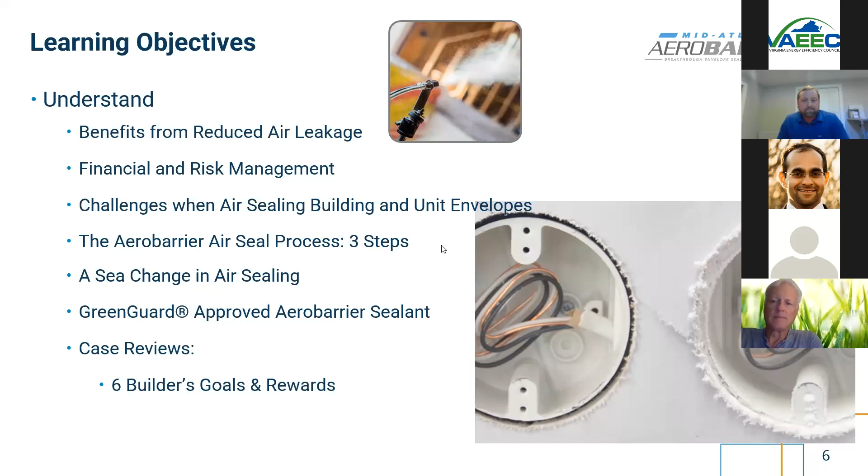So again, when discussing the benefits of reduced air leakage, this is really important to our end user, right? We've realized that we're reducing air leakage, and we have savings in home heating and cooling. But not only that, we're also reducing HVAC load requirements, so correctly sizing the HVAC equipment. And then operational costs benefit because of correctly sizing heating and cooling. We really want our end user to have a more comfortable home, and air leakage plays a huge part in that, over just what type of insulation we're putting in the house. So we want it to feel warmer in the winter and cooler in the summer. Those are the goals. We also want to help prevent moisture from entering the wall system.

So this is a big thing for us in terms of reducing conditions that can lead to mold growth and water infiltration. Some of the secondary benefits that we don't talk a lot about, from reducing air leakage, is that we really want to try to minimize noise transfer. We find that we can get up to 40% reduction in outside noise from traffic, neighbors, and even the multifamily space with adiabatic wall systems.

Down specifically in the Southeast, a big point of interest, and really across the US, we can use reducing air leakage to minimize insect and pest infiltration. So we want to seal up those gaps and create a good barrier between the outside and inside for critters to get in.

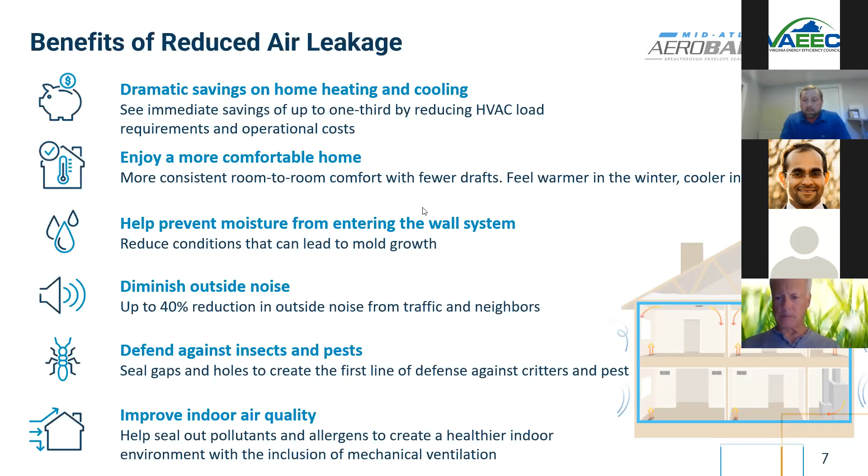So we're talking about the financial and risk management. Basically, we want to look at these bullet points in terms of our area of focus. I already talked a little bit about mechanical equipment. The first thing we want to do is right size equipment and our duct systems and vents if possible, engaging with our HVAC contractors and builders to make sure this is a good first step when we're talking about air leakage reduction.

The other part of this is we want to talk about warranty. How can we affect the warranty of the space by reducing air leakage? That should be playing into it, right? We don't want outside contaminants coming in, we don't want moisture coming into the building, because that can all lead to other things affecting the building products and create warranty issues.

And then we also want to talk about the build materials. When we reduce air leakage, we're also trying to extend the life expectancy of our build products in the space. The other big thing with reducing air infiltration is we can reduce it down low enough that it can have a positive effect on potential rebates, whether regionally based or even on a national basis for tax incentives. We talk a lot about 45L for residential and the 179D tax incentive for commercial space.

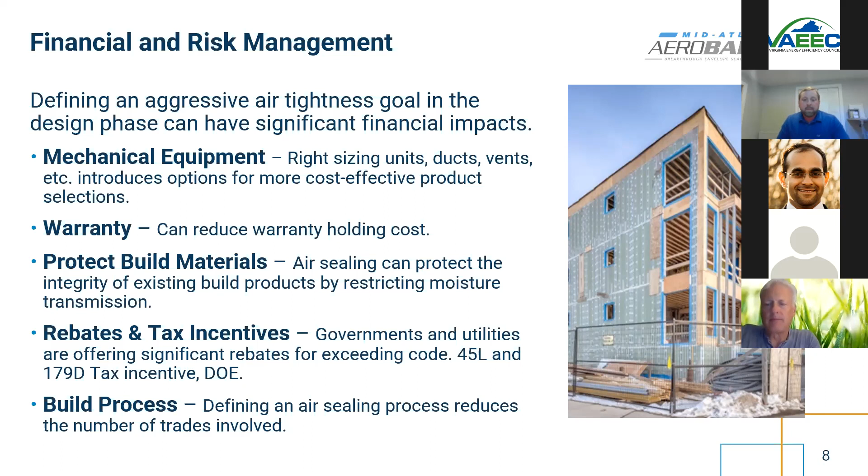And then about the build process: if we have air infiltration issues, how many trades will have to be involved in making corrections in the field? What does that do to our construction schedule, extending it out? I've seen it actually delay people moving into homes, or even into multifamily buildings where you have to put them up in hotels. So there can be some really adverse financial impacts directly related to air leakage that we don't think about on the back end.

I covered this a tiny bit in a few of the previous slides, but now really diving into the challenges with air sealing. With traditional air sealing, we know we have to involve many trades. There's sometimes a phrase around 'you drill it, you fill it,' but sometimes that gets lost in translation around who is actually filling the holes that are being drilled.

And then we also need to look at the list of materials that are involved in that as well. It could range from 2 materials up to 8, sometimes 9 or 10 different materials to achieve our overall air sealing goals.

And then we also need to work diligently on where to seal. To coach and train those in the field that are implementing, we first need to understand where our vulnerabilities are in the space. If we're fortunate enough to have an architect or developer make notations, or a governing body like a low-income housing tax credit program, or a green sustainable certification program call out specific areas, that isn't always the case. So we need to be able to understand where we need to seal and who is involved in that, and the list can be pretty extensive, and then who is supposed to be following up on that from a quality assurance perspective.

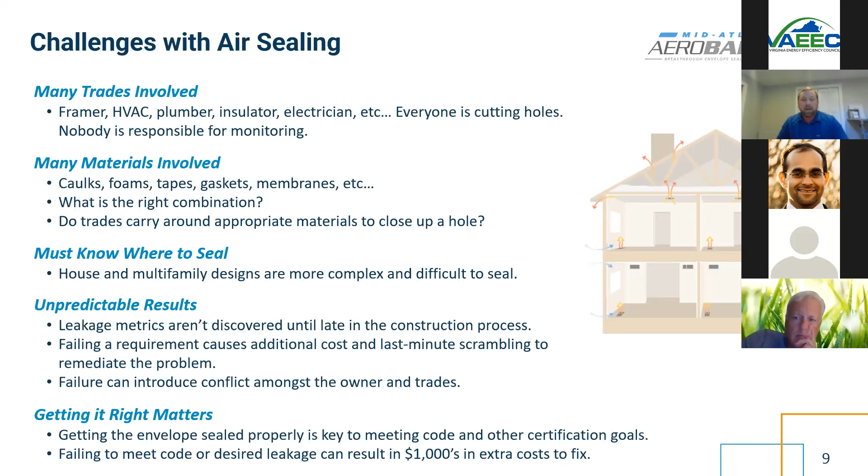Next slide. Oh, let's see, is that the right one?

Go back. Yeah, okay. So air sealing, challenges with air sealing buildings and units. We've talked about units in the multifamily. Really we need to start treating even for multifamily, those party walls, we should be treating each one of those units as almost its standalone home. It should be able to function independently of the rest, and we should be able to create an environment that can be controlled by the end user and not being dependent on the common space outside or the neighbor on the other side.

So we want to be able to work on those demising walls from a design standpoint and try to minimize the air leakage through all the penetrations, not just to the exterior again, but to the adiabatic space, both to the common space and to the unit next door.

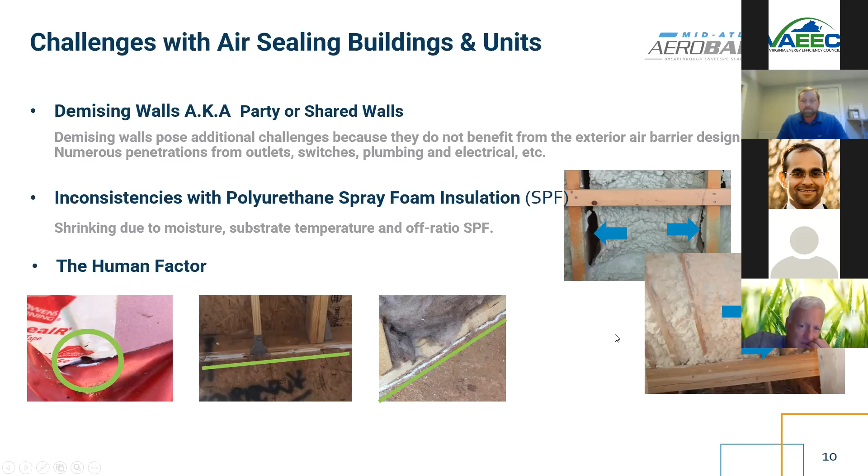So we are essentially blowing up the house like a balloon, or the building like a balloon, and we're emitting this acrylic sealant into the air, which are in small particle sizes. They are hanging in suspension, and then we're using a fan. So our generation 1 fan was a traditional Minneapolis blower door fan. Our second generation is what we call a Retrotec fan that has a little bit more power.

But anyway, we're pressurizing it, and we're using that airflow to move those particles around and seal up any type of leakage points in the building envelope automatically. And as long as that pressure is finding a pressure difference in the wall assembly, leading to outside the conditioned space, it will seal it automatically with the acrylic aerosolized sealant.

But before we get to that point in actually spraying in the AeroBarrier sealant, we have to be able to prepare the space for the sealant. So the AeroBarrier sealant does not identify what should be sealed and what shouldn't be sealed. So in this case, we do not want to seal up any type of vents leading to the outside, whether that's mechanical ventilation or plumbing stacks. We don't want it to seal any windows, so we tape off the windows. And we don't want it to seal any tubs, so we seal off the tubs.

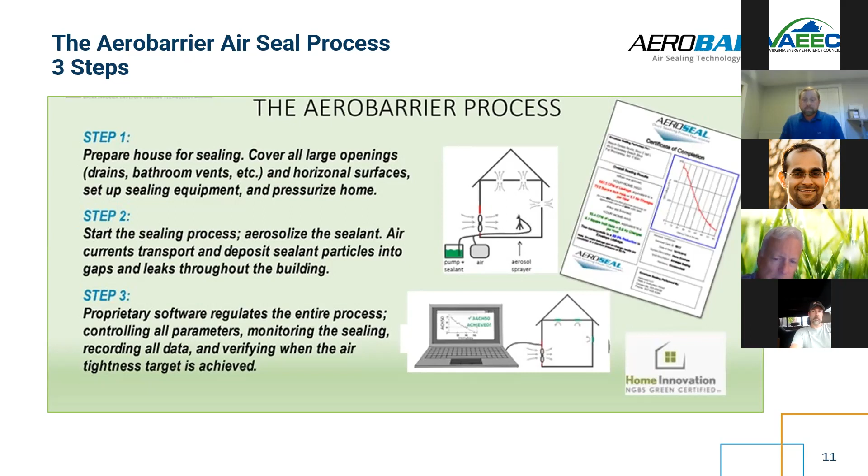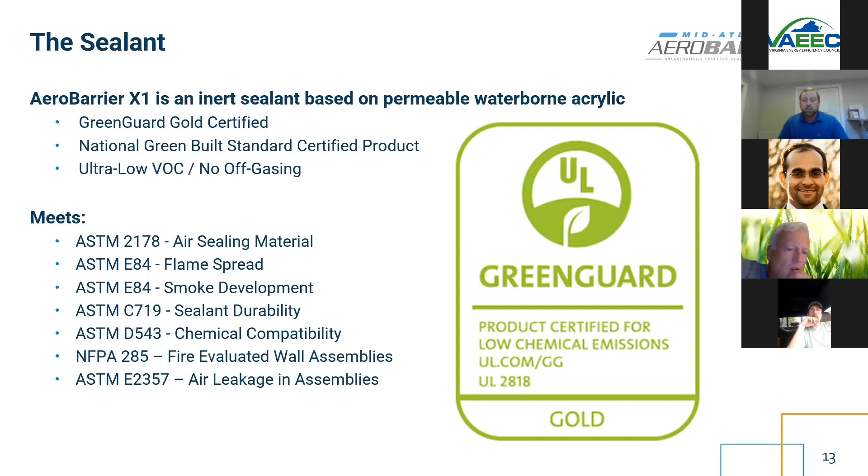This list over here of what requirements we're meeting, that is something that we are constantly working on growing, which is always a question for architects and developers and other funding sources. And we have had requests to keep adding to that list. So something new usually comes in every day. Can we meet a new requirement? Next slide.

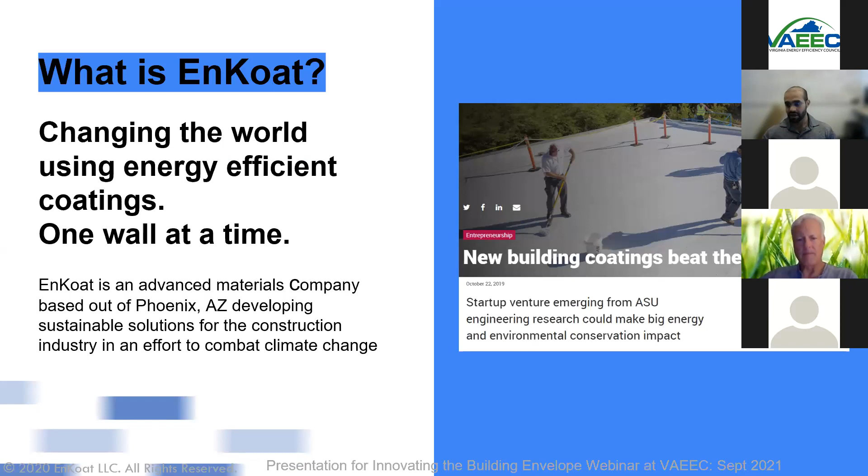So Matthew and I are co-founders of EnKoat. We've been working a long time now, since 2013, when we were PhD students at Arizona State University. Together, we have worked on several R&D projects. Our main focus has been to scale fundamental lab scale research into commercially deployable products. And over the last years, we've worked on several of these projects in the construction industry as well as in the climate tech industry. I serve as the Chief Technology Officer and the COO at EnKoat, and Matt is the CEO of EnKoat.

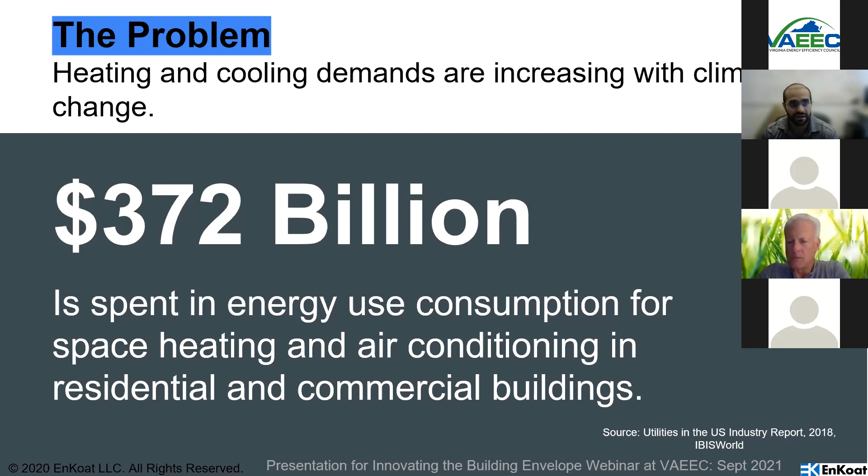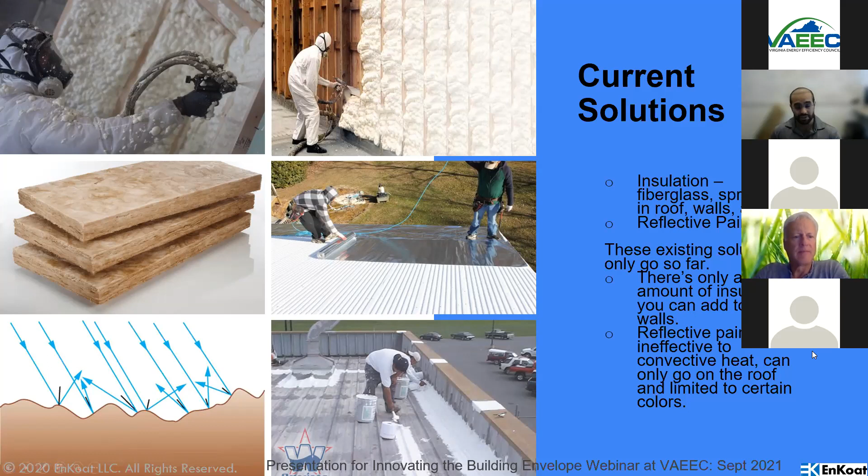So as a result, a very thin layer of EnKoat paint or a very thin EnKoat panel is equivalent to several inches of existing fiberglass insulation. So you can use that as a retrofit application as well as for new construction. So if you are going to paint your roof, you can use EnKoat paint with it. And instead of just being a regular paint, which is used for aesthetic purposes, now it also has the additional insulative properties. Now, how does it work?

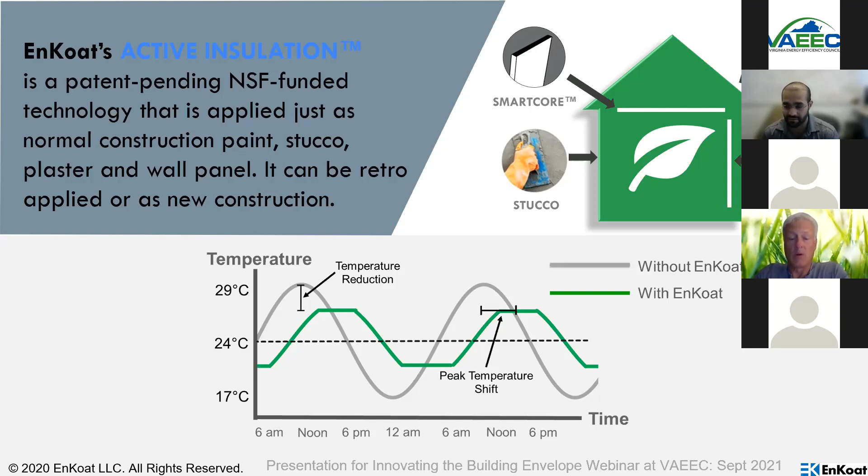As a result, active insulation helps you save money on your heating and cooling costs, shifts peak load to off-peak hours, and reduces the carbon footprint of the building in terms of both embodied carbon and operational carbon. With conservative estimates, at scale EnKoat's coating solutions can lower carbon emissions by more than 100 million metric tons. That is why active insulation is the green answer, usable for both new construction and retrofit applications.

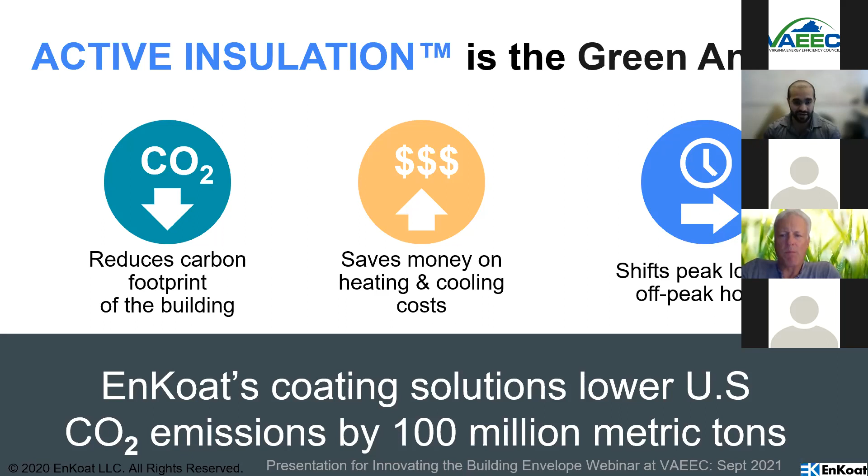Over the years, we've validated and tested the technology in our lab, as well as conducted field testing and pilots using our products. The thermal images on top show a clear distinction between EnKoat's paint product and a commercially available roof paint product in the market. If you look at these two images closely, you can see the left side has a significantly higher temperature than the right side.

This was a lab study where we took a standard wall panel and painted one half with a commercially available roof paint and the other half with EnKoat's paint. Using thermal testing, we subjected both to the same identical heat source, and over time captured thermal images showing the difference in temperature. In both images, the difference ranges between 7 and 10 degrees Celsius, about 10 to 15 degrees Fahrenheit, between an existing roof paint that's supposed to save heating and cooling costs, and EnKoat's active insulation roof paint.

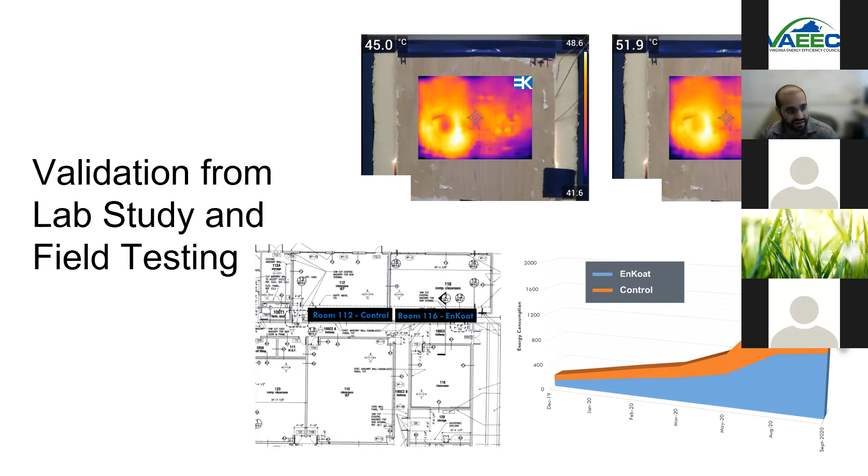As I mentioned, we are a startup, so our journey in product development has been testing at different scales to validate the technology and make sure we're ready for commercial deployment. We started with initial lab scale testing, quantifying the performance of these materials on a small scale. From there we developed different products — paint, plaster, stucco, and wall panels — and implemented them at different scales in the field to see the actual impact. In 2019, we conducted our first field scale testing with our stucco product: two identical mini houses, one coated with a commercially available stucco and the other with EnKoat's active insulation stucco. We fitted air conditioning units in both, set to the same temperature, and measured energy consumption. We saw a 15% reduction in the EnKoat mini home compared to the other one.

Then we conducted the roof paint study at Arizona State University, collecting data for 12 months. Beyond that, we received funding from the Department of Energy's National Renewable Energy Laboratory, collaborating with NREL to conduct third-party testing on our product, and they independently validated the performance and energy savings of EnKoat's technology. Recently, we received funding from the National Science Foundation to further improve the product's performance and optimize it for different climates, so it works for warmer and colder weather. Currently, we've completed the majority of our research and development, and we're now looking to partner with cities, utilities, builders, and contractors to establish commercial pilots to validate our technology further in different climates throughout the world.

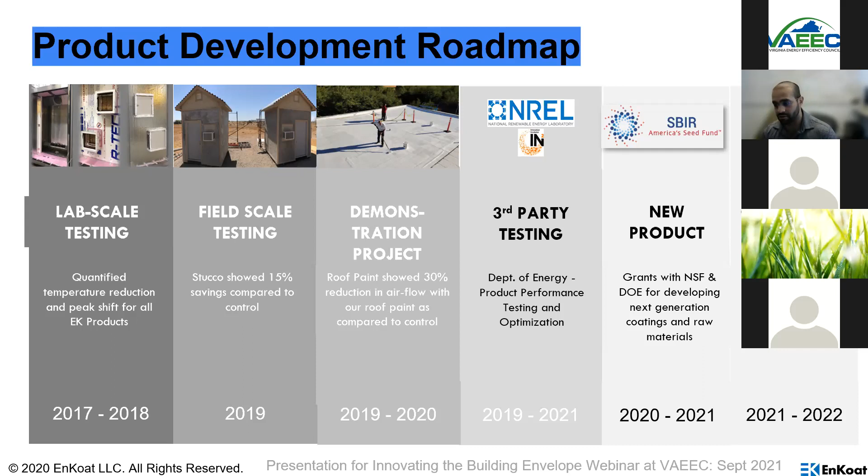Over these last few years, we are proud to have several partners and collaborators in our journey, including the National Science Foundation and the Wells Fargo Innovation Incubator. We were also a participant in the Joules Accelerator 6th cohort in 2020. And we are currently working with Duke Energy on a couple of pilot projects. In essence, we are now looking forward to establishing more commercial pilots in different parts of the country.

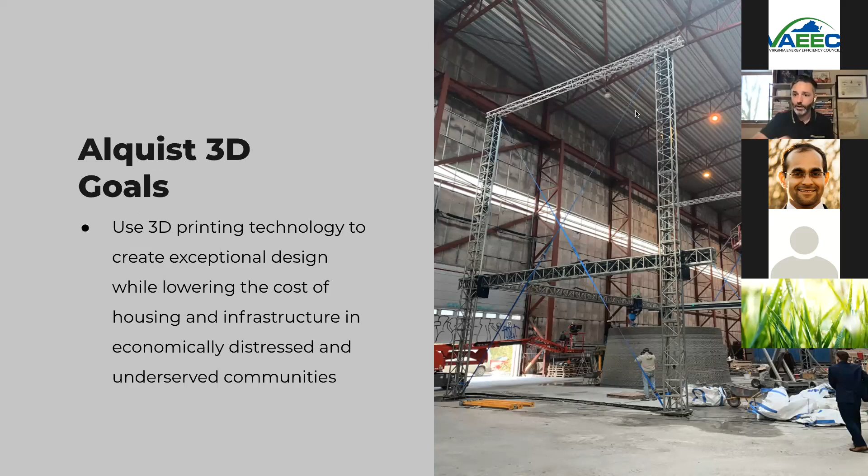Rural America has a housing crisis, and one solution to that is using new technology. This is really what's driving all of the work that we're trying to do. Every time a home goes up in price by $1,000, we're pricing out 150,000 American families. So housing is incredibly out of control. Alquist 3D uses 3D printing technology to create exceptional design to lower the cost of housing and infrastructure in economically distressed and underserved communities.

We have a focus on rural America because there's this myth about rural America that there's just no good paying jobs there, and we know that's not true. The reality is there's thousands of great paying jobs in rural America. In many cases, we just need more people to take the jobs, but we can't get more people to take the jobs until they have literal homes to live in.

It's also driven by this age-old idea of incentives for companies. We used to incentivize companies with dollars to move to our community to create as many jobs as possible. That's not necessarily a bad thing, but the problem is today, it doesn't matter how much money you offer a company to move to your town, they're only going to come if you've got a community that looks like this, that has vibrancy and is a place where that workforce wants to live.

We've been tracking new ideas for what we hope will soon be a post-COVID world, and we believe that rural America is the next place to innovate. We're basing this on a lot of the American migration trends that we've tracked over the past 20, 30 years. What we've seen is the coasts of our country are completely oversaturated, and they have been for decades, so people are leaving and coming inward.

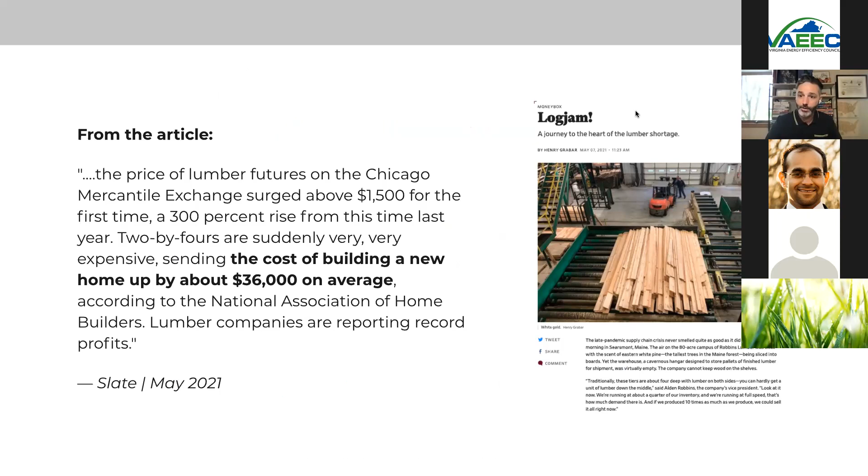Coronavirus caused all of this disruption, but how can we come through it? What we're seeing now is that these migration patterns, people leaving the first and second cities, are sometimes completely bypassing third and fourth cities. They're going to rural communities. We didn't think that would happen for another 10 to 15 years, but the pandemic sped a lot of that movement up, and we're seeing these population trends come in. But again, we need places for them to live.

People are fleeing big cities all the time for a variety of reasons: economic, climate, social, healthcare. But if they're going to come to a rural community, we base it on this rural hierarchy of needs. All of these pieces of the puzzle are needed for a community to take the next step, but the base of it is housing. It doesn't matter if we've got great high-speed internet and medical infrastructure if there's nowhere to live.

We now know that by the end of 2023, roughly 15% of every major urban area will have lost about that amount of population. That's about 30 million Americans on the move right now and through the end of 2023. So now is the time, if you're a smaller community or any community, to work to bring some of them in. And this fits really well with the major findings that just came out of the Harvard University study last month.

Number one, the inventory of homes for sale is at historical lows. Number two, home prices are rising rapidly. We just surpassed $320,000 as the median home price. In California, it's over $1 million. Rents are down sharply for high-end apartments in some high-cost urban markets, which further illustrates people leaving urban areas and moving to suburban and rural ones. Renters and people of color fared by far the worst during the pandemic, and a growing number of people are experiencing unsheltered homelessness.

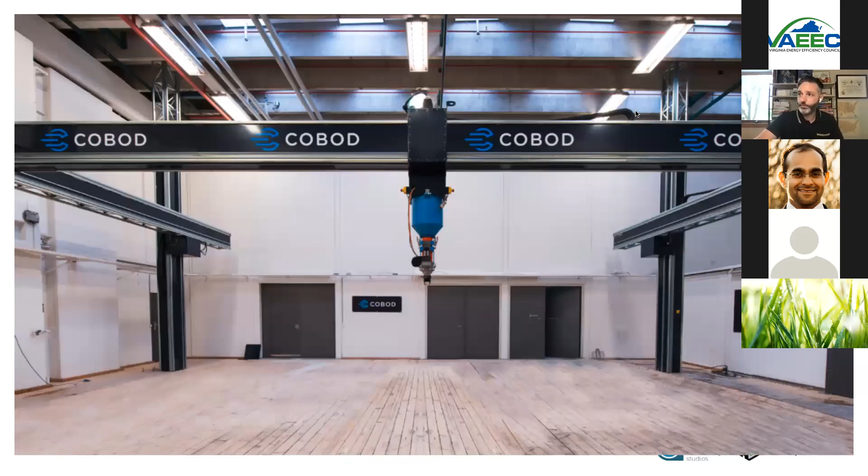This is the first ever 3D printed structure in Europe. It was printed by a company called Cobod, who's our partner. It was printed using this machine, a BOD 2.5. We've finished our print and now we're building out the rest of the home, a collaboration with Virginia Housing and Virginia Tech.

The goal is to print a 1,550 square foot, 3-bed, 2-bath, single story slab on grade home and do it at the lowest cost possible. It was important to us that when we did this home, we wanted to do something that fit well with the community, that looked like a home, any other home in that neighborhood.

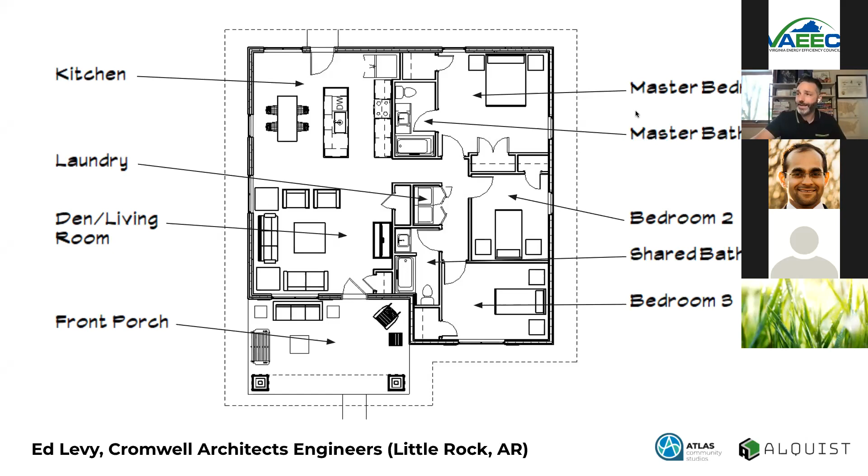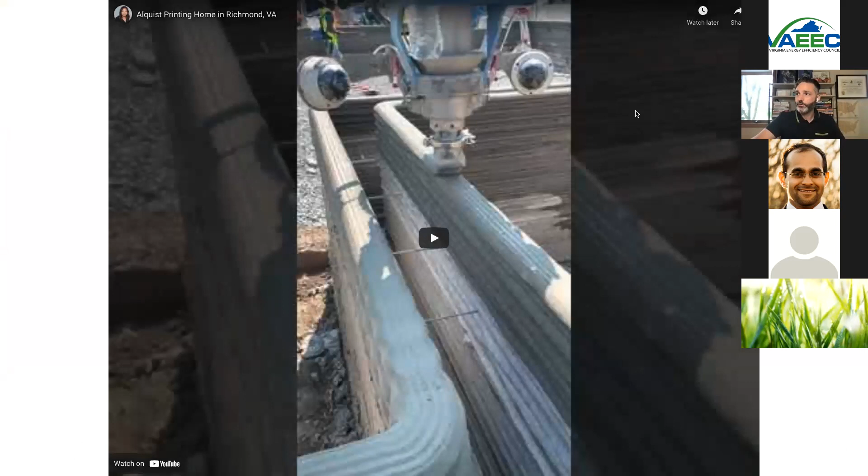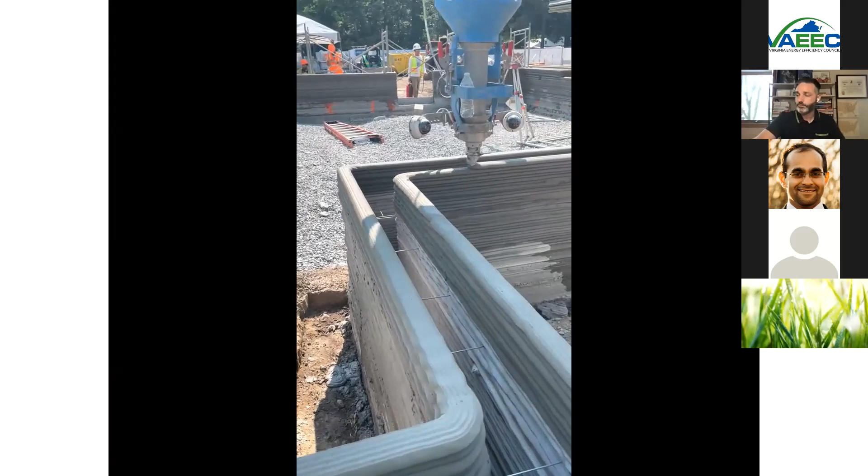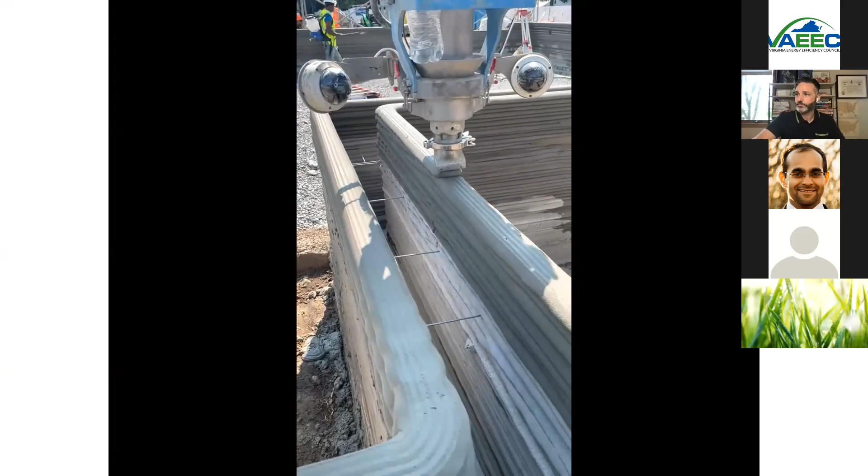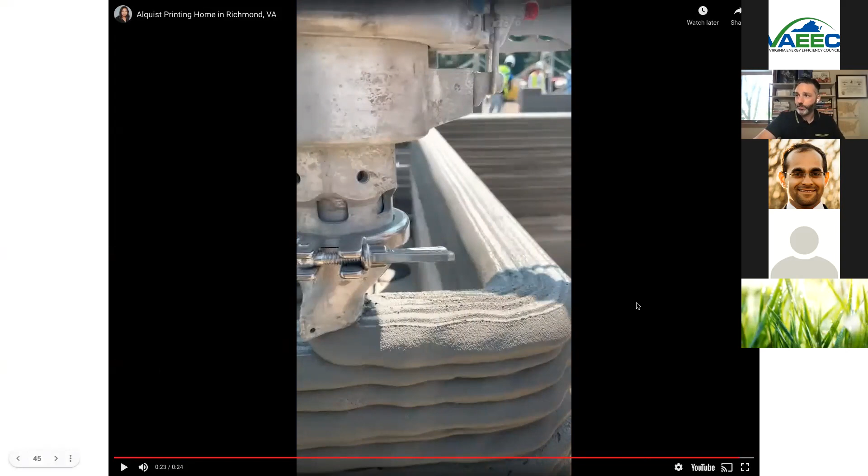So that's the printer not moving at even top speeds, not even close. We've gone a little slower that day, but that's how this works.

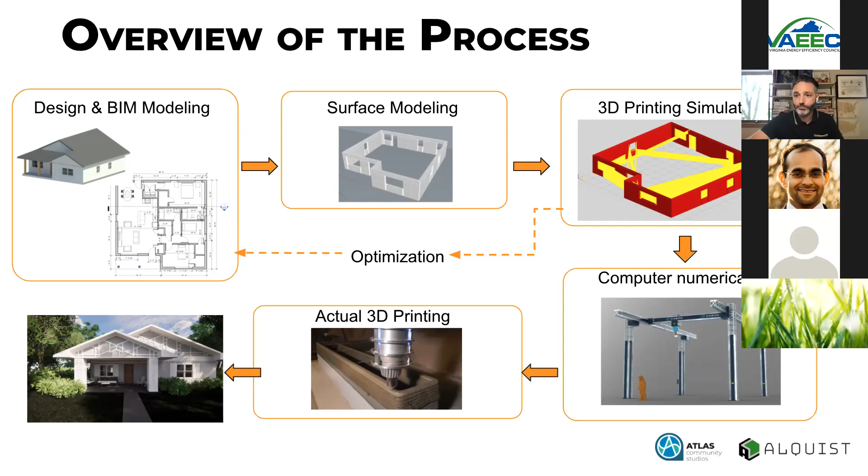It basically starts with a BIM model, goes into surface modeling, and then into the 3D printer software that comes with the printer, called Slicer. That goes into the computer and prints the home. Pretty simple—it's actually not simple, but that works out.

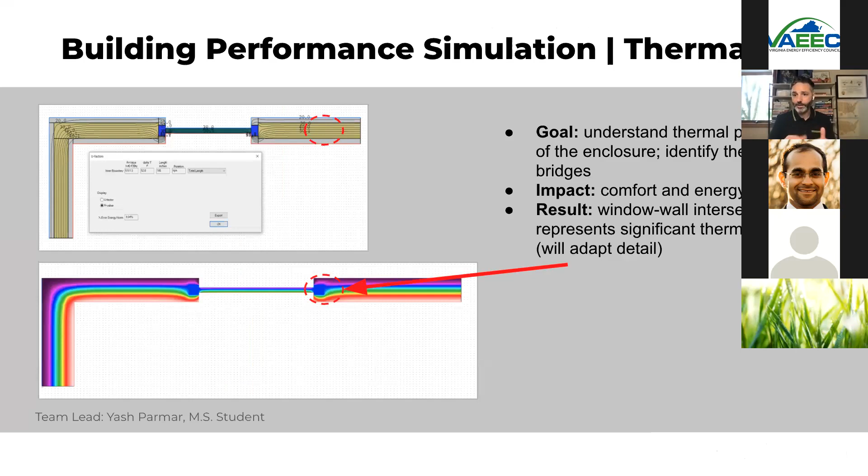In terms of today's discussion, we now know these homes are thermally broken, being surrounded by concrete. That's going to reduce the energy use in these homes by at least 50%, according to the study just conducted by Virginia Tech of these homes. Of course, they're also incredibly strong.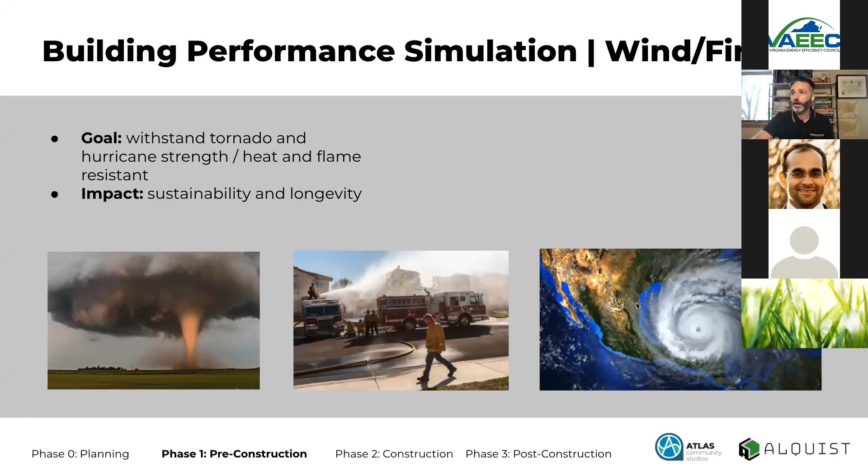We know that they can withstand tornadoes and possibly hurricanes. They're fire resistant and have incredible durability. The understanding is about 175 years.

We're also putting Raspberry Pi technology inside all the interior walls of our homes so we can study water, moisture issues, and vibration issues. This also acts as your home alarm system and your smoke alarm system.

Every home will also come with a personal 3D printer built into the kitchen, no different than a microwave. We're doing this so folks can do home repair on their own. For things as simple as light switch covers, we can save the homeowner lots of money on home renovations and other ideas we're going to play with.

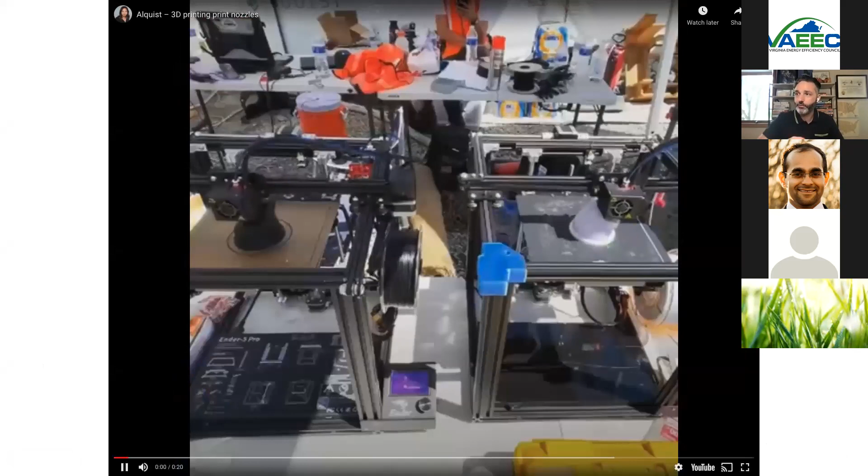We also had a very unfortunate circumstance that turned into a great thing. In Richmond, while we were printing, somebody broke into the site overnight and stole our print nozzles, which is really crazy, but it didn't set us back. We got out our 3D printers, printed brand new printer nozzles, and got back to work an hour later.

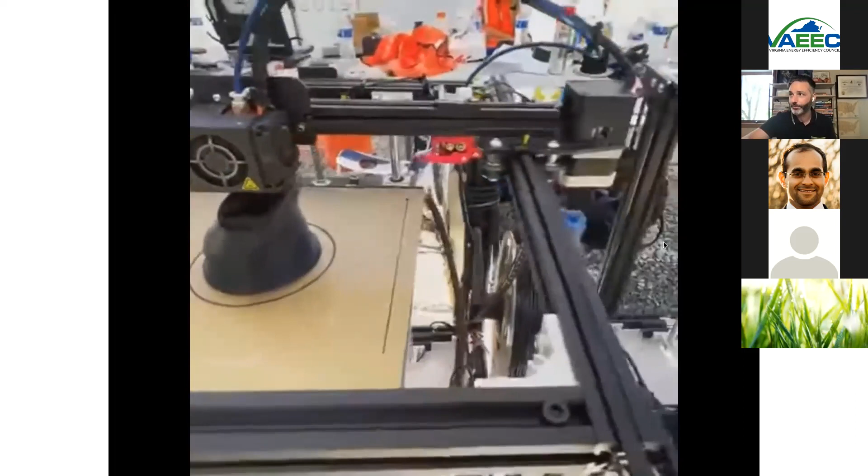This is what those look like. This is the future of extrusion coming from those print nozzles. This is an aerial image of the home that was completed last month.

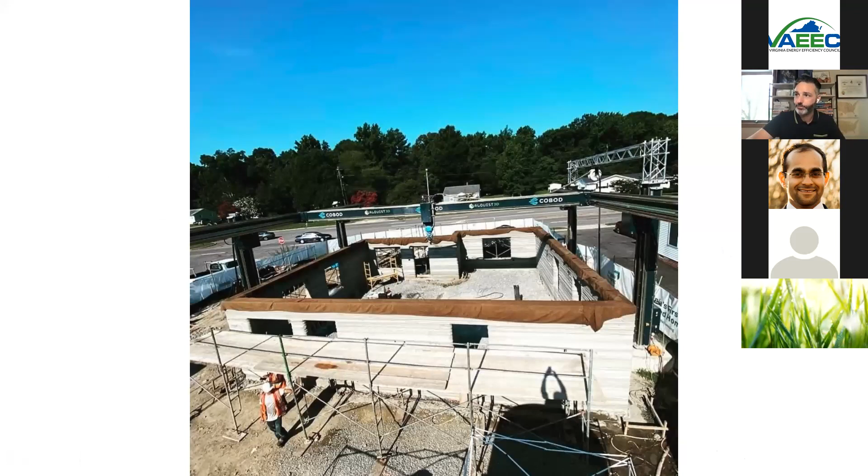We printed the exterior walls of that home and the slab was laid a few days later. You can see right here, plumbing and electrical are in, and this week we're putting in the interior walls and the roof is going on as well. This home is scheduled to be completed at the end of this year.

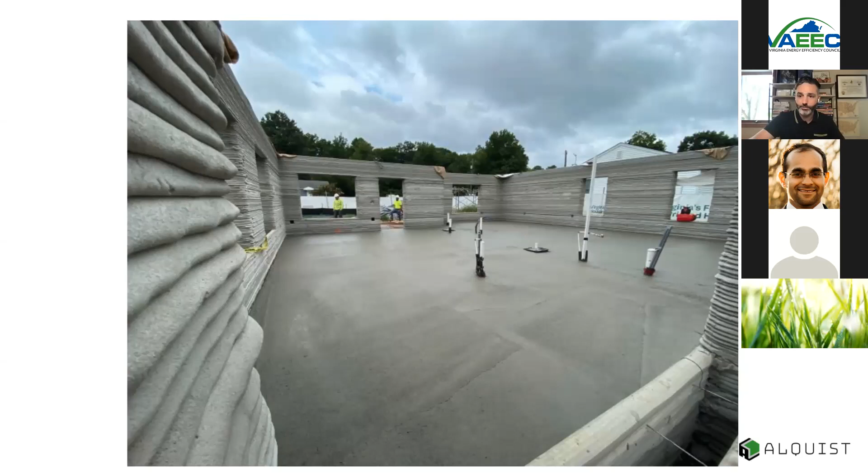We've gotten lots of accolades, which has been fantastic for the state of Virginia and for Richmond. We also want to get into workforce development and start training programs to bring people into this work. We've got a housing camp starting next summer to train people in this technology.

And we're already starting with young folks here—these are my two kids on the site. You can see the differences we made between home 1 and home 2.

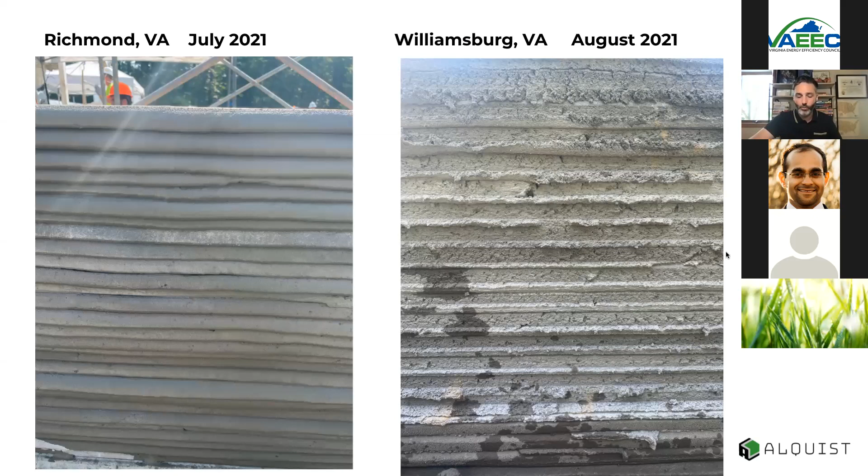We've recently completed home 2 in Williamsburg, Virginia, with Habitat for Humanity. The difference in the wall structures there is dramatic. There's still a very steep learning curve to this technology—a lot more issues we have to contend with—but we're making pretty big strides all the time.

We're also going to be partnering with One Vision Holdings, which is creating a proprietary hempcrete. That hempcrete can be used across the board for home construction, further making this a much more green home and dropping our carbon load dramatically.

Again, it's all about the hierarchy of needs we need to pay attention to, with housing at the base. I'll show you a few images here of the home with Habitat for Humanity.

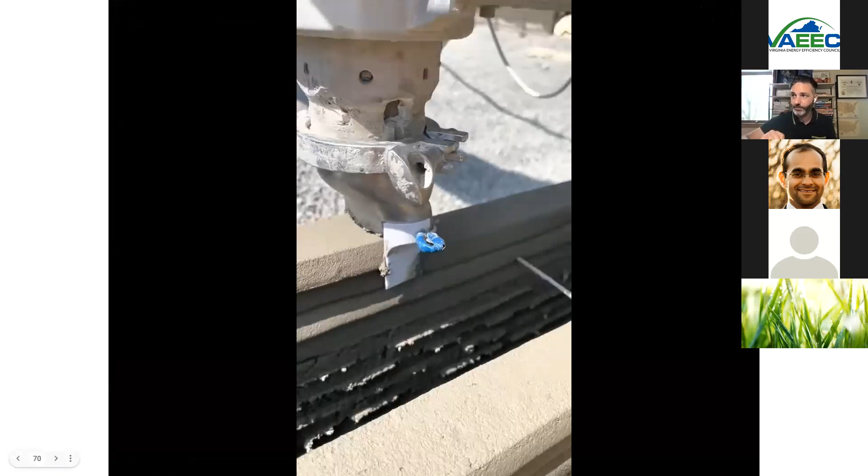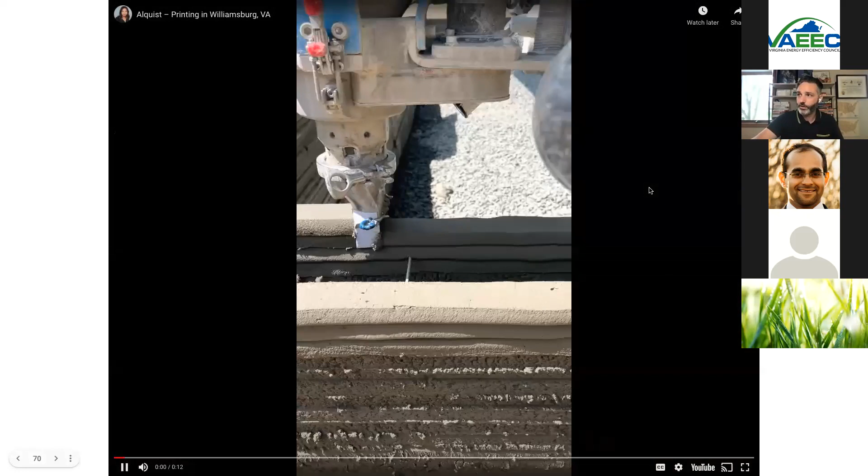Here you can see we've now 3D printed—the speeds are faster. We printed that little piece of plastic there, the flap, that smooths out the concrete as it goes, giving the home a much better look that we like. You can see that here in these images of the home we just completed in Williamsburg for Habitat for Humanity. I think we're out of time, so I will skip that.